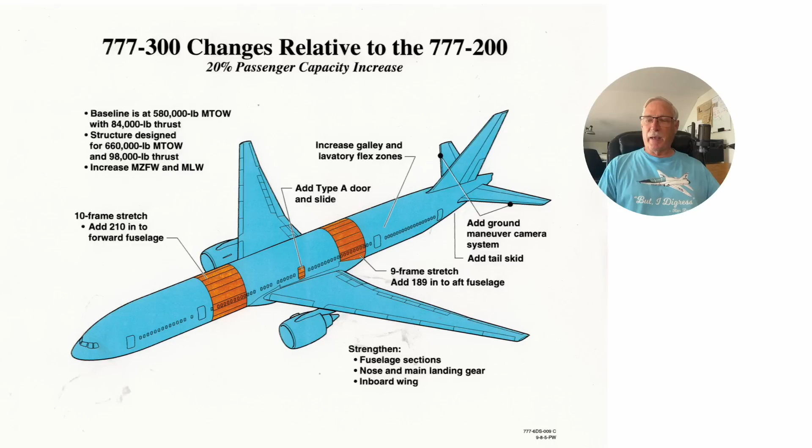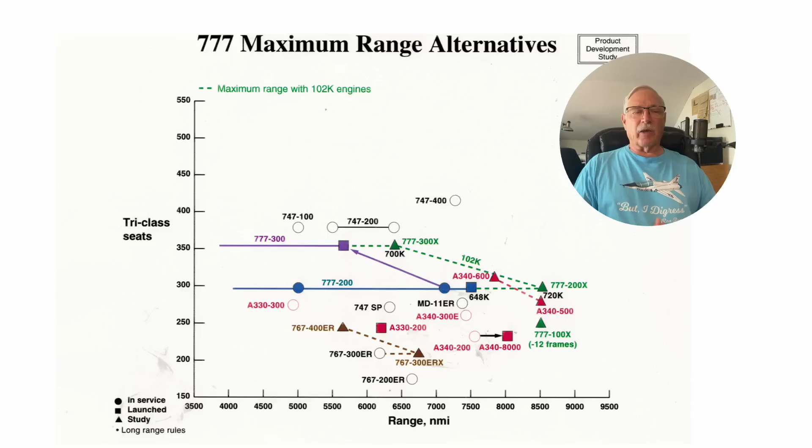Kind of interesting. Oh, and here's another slide you'll like: if you want to put people in, if you want range, we got an airplane for you. We'll give you whatever you want there as far as range, and we got an airplane to fit the bill. And then, of course, they talk about what they do to increase the range configuration, how they extend the wing fuel tank and strengthen the wing, obviously.

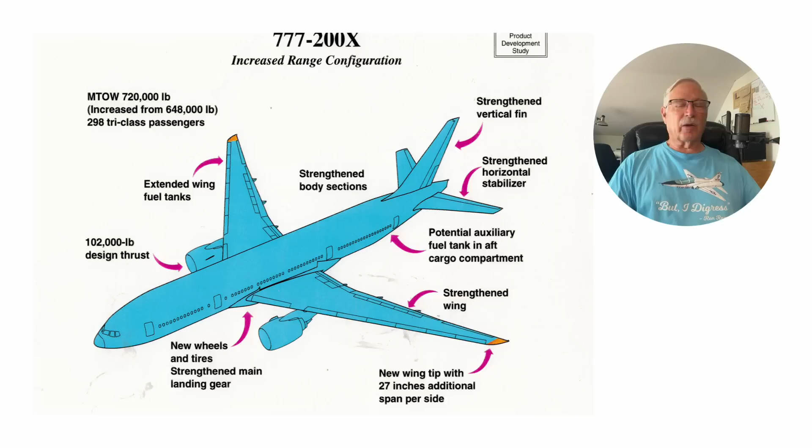And they talked about a tank in the aft cargo compartment. One of the funny meetings with John Cashman, they talked about if you had to dump this fuel out for any reason, like an emergency, and he says, well, make sure that you dump it into the main tank, not out the back. Kind of interesting, and it could go up to 102,000 pounds of thrust. Now, that's a big engine.

Now here's a little bit more information about the 300. Vertical fin, they were adding a tail strike, a tail skid, not just a tail strike indication but a tail skid, because they thought the chance of a tail strike could be more likely, and I'll talk about that in just a minute.

The 777 that we actually flew was the number one 777-300, and it had about 500 flight test hours on it. At the time we took off, we weighed 501,000 pounds, and 163,500 pounds of that was fuel.

We were also using the Rolls-Royce Trent 892 engines, rated at 90,000 pounds of thrust. They had three spools - an N1, an N2, and an N3. That was kind of interesting on start, to watch those engines spool up.

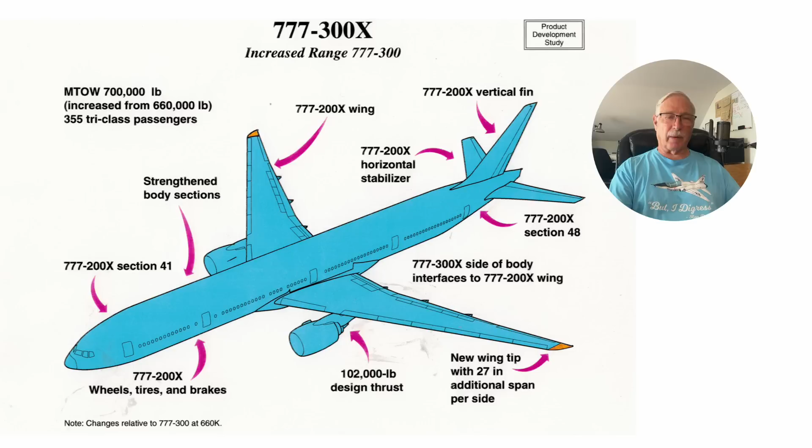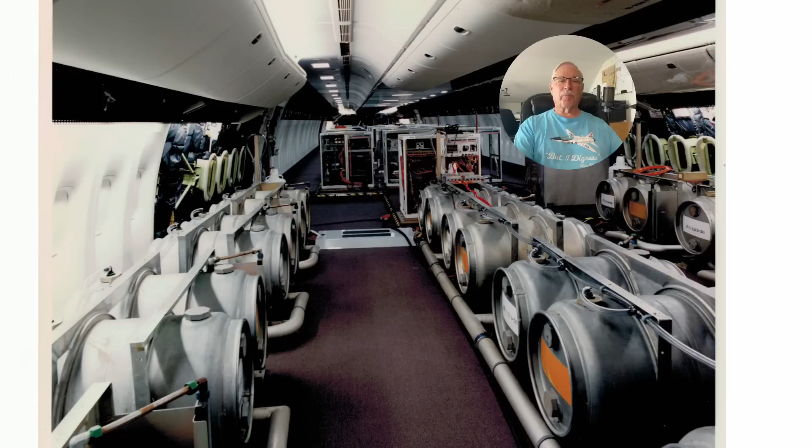Also, flight test aircraft have the ability to change the center of gravity for doing various CG tests, which of course are necessary for certification.

I've never done one of these tests. I hear it's very interesting and actually quite difficult to do, because it's not a natural pilot thing. I'm sure there are plenty of pilots out there who have scraped the tail on takeoff unintentionally, but you try to do it in flight tests like the 10 foot per second landings that I did. It took me 3 tries to get that right, because although I could do it on commercial service, plunk one in, trying to do it on purpose was a lot harder.

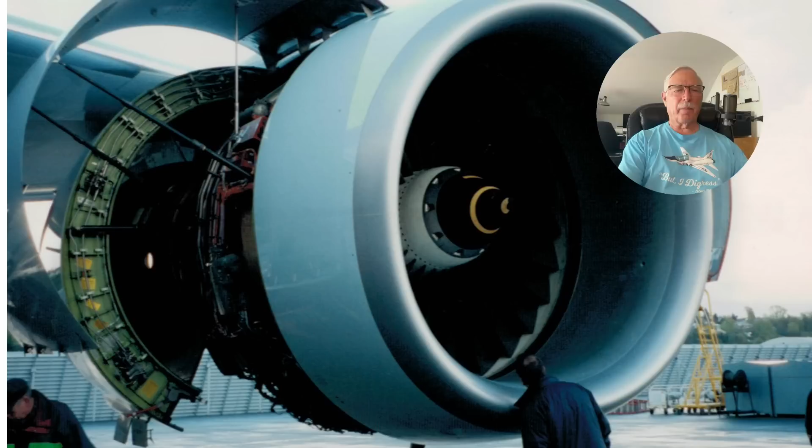Okay, this is a long airplane, and they were really worried about tail strikes. So they incorporate a protection and an indication system if you hit the tail strike. Also, after your takeoff, you'll get a printout on your rotation rate and your pitch attitude on takeoff, so it kind of tells you if you're doing a good job or bad job, because you can hit the tail on takeoff or landing. I think if you're ham-fisted on takeoff and rotate too fast...

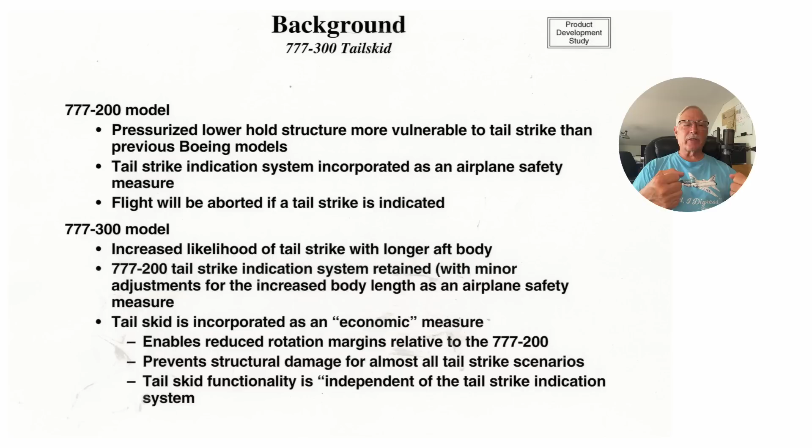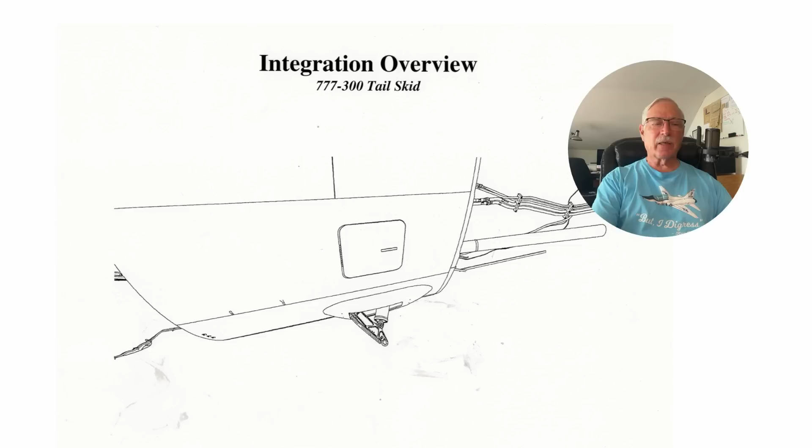And there's a depiction of the tail skid that extends in landing once the gear's down. And there's a diagram of various margins on the tail skid when you actually strike the tail, and what you should have for a normal pitch attitude at touchdown. And these are conditions - this is the takeoff condition, and this is the landing condition.

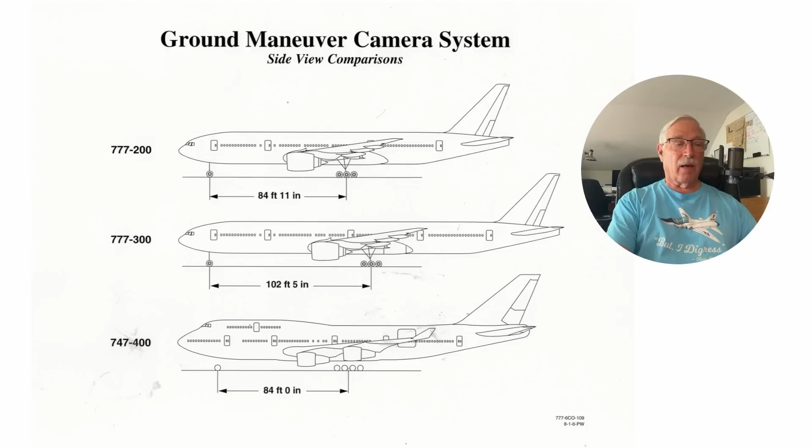And just for the interest, there is a comparison of the gear position. The 777-200, it's 84 feet back. The 300 is 102 feet back, and the 400 is only 84 feet back.

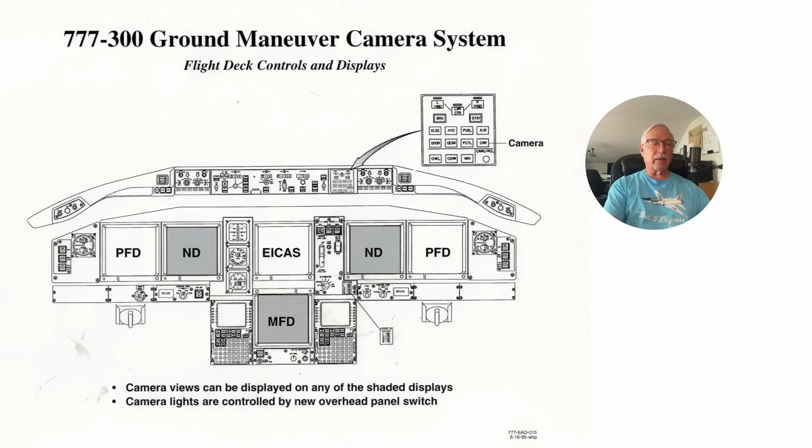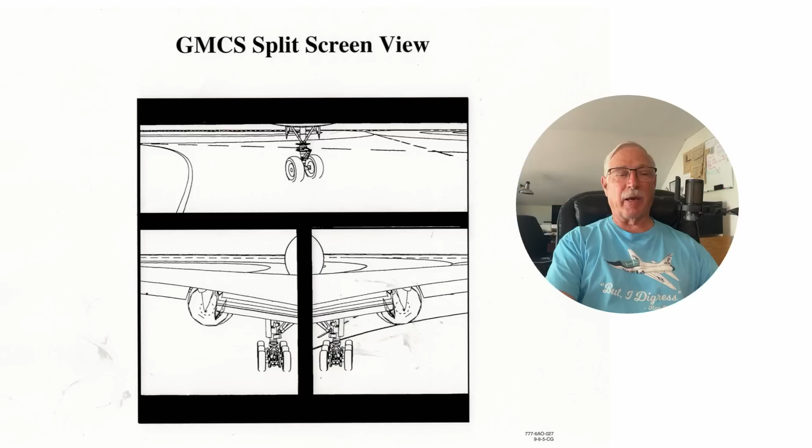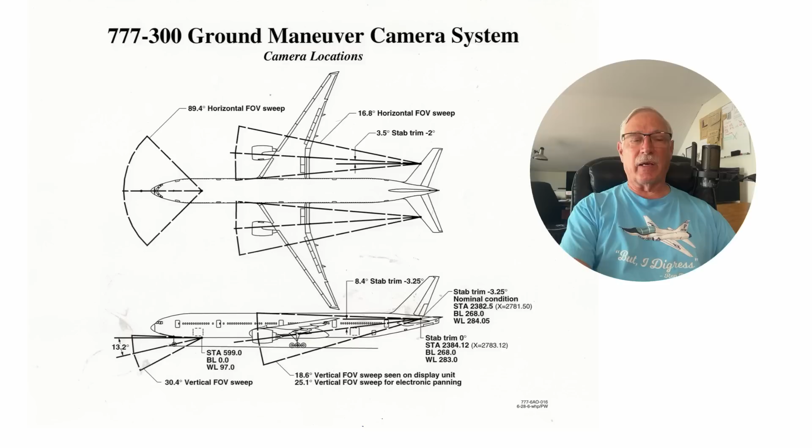And there is the control panel for the ground maneuvering system there. Cameras can be displayed on any of the navigation displays or the multifunction displays down there. I wish I had a picture of an actual presentation, I didn't get one unfortunately. But basically, you can see the nose gear and you can see the main gear and the engines. And like I said, it's fun to watch the gear extend and retract. And there's some more information on the ground maneuvering system and basically the view range of the cameras.